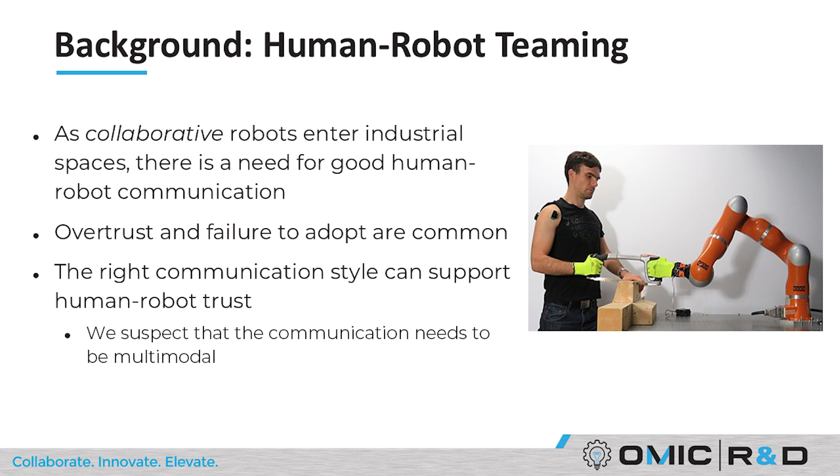We suspect that when we're doing this for robotics in particular, we may need multimodal communication. Most likely you have alerts, lights, sounds, and on-screen messages in your own organizations already when it comes to automated technology interacting with people.

When we're thinking about robotics in these spaces and wanting to grab human counterparts' attention as they interact with robotic systems, we're thinking about a suite of potential communication mechanisms, partly because the space is already so noisy and crowded. Maybe we need motion, sound, or verbal speech. Although under the umbrella of the project I'll talk about today, we're mostly thinking about expressive motion as a way to augment successful human-robot teaming in industrial contexts.

At a broader level, the framing of this work has to do with collaborative robotic systems, which for about a decade have been an exciting idea. We've seen many bids in industry to develop collaborative robotic arms. Some of these platforms are still in use, some are now defunct, but you can see the progress driving change in the model of robotic systems, moving from robots isolated by cages to robots that can move around warehouses with people and directly physically interact with people.

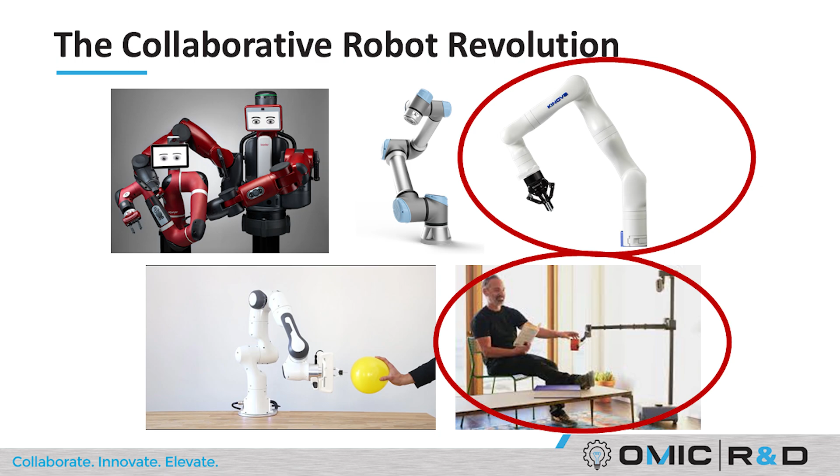Two platforms in particular that I've used throughout my work so far are the Kinova Gen 3 arm and the Hello Robot arm. The Kinova is nice because it's a collaborative robotic system in a classic industrial robotic form factor. Robot arms have been around for a long time, although historically more often in cages than not. The Hello Robot is nice because it represents a modern mobile manipulator.

So a robot with a mobile base and also a grasping arm, which, when you want to deploy robots and really get impact out of them, it's helpful if they can grasp things and move around floors with things. So we were thinking about those robots as we developed this work.

In the current phase of this work, as we continue the project this year, we're thinking about the Kinova arm more. In the work I'll present here today, we were mostly thinking about the Hello Robot Stretch, the mobile manipulator form, which can move around and also manipulate objects for things like part tending, pick-and-place operations, warehouse operations, that sort of thing.

When we boil down the problem to its core context, the basic problem we were trying to address is that communication between humans and robots is limited. Most industrial robots, at least for now, lack these nuanced multimodal communication modes, which can be detrimental when it comes to adopting and safely using new technologies, especially robotic technologies in industrial spaces, collaborative robots.

So our goal was to advance the state of the art of human-robot teaming by improving robot nonverbal expression, seeing if we could fill in some of these gaps in understanding what the system status is, what the system needs, its intentions, and being able to more successfully and symbiotically work with these types of systems in industrial contexts.

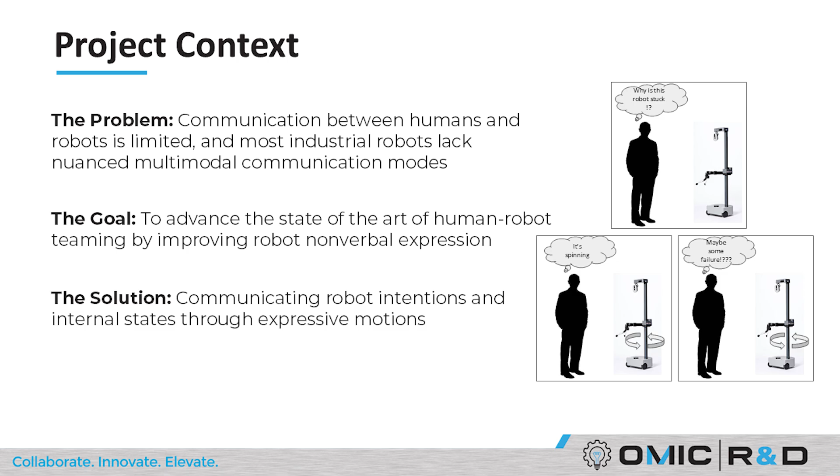For the scope of this round of the work, this first year of the project, which is the core of what I'm presenting here today, I'll look forward to presenting at the end of this project the latest updates with the Kinova Gen 3 as well. For now, we were really focused on the solution of communicating robot intentions and internal states through expressive motions.

In my lab's work in the past, we also have sound-based communication, both verbal and nonverbal. We've thought about things like the physical form of the robot, how the way the robot looks actually influences the way people approach it and adopt it. So for this project, we wanted to fill in one of the remaining slots in the potential multimodal human-robot communication, thinking specifically about motion.

But when you zoom out and think about the broader scope of my lab's research, this gives us just one tool in a suite of tools to be able to elicit successful human-robot symbiosis in industrial contexts.

So backing up to the core research questions, within the scope of the work I'll present today, we wondered how motion-based nonverbal expression of the robot could communicate its intentions and states to nearby people.

You'll see that in some robot videos I'll show, a beginning kind of psychological experiment that we did with robots and people, and I'll talk at the end about how we can expand this, thinking about broader multimodal human-robot communication and the work we're doing this past year.

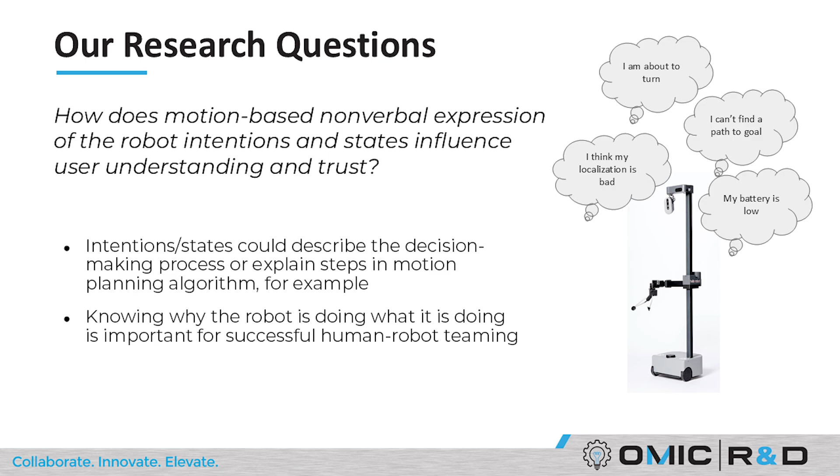Robots have internal states, they have intentions, they might have a status like low battery, maybe even, from the last presentation, a tool is about to run out and you need to replace it. All kinds of automated systems.

So understanding things about system state, whether it's notification, warning, or higher urgency error or alert, can be really helpful to be able to convey in a broader range of ways.

Also understanding things about intentions, especially when it comes to mobile manipulators. If you're walking around a warehouse with a robot or autonomous forklift, you might have done this before, understanding where the system is about to go, where it's planning to go next. Even simple things like that can be quite challenging.

So we're thinking about those types of problems, helping robots communicate states and intentions for more successful co-location by humans and robots in industrial settings.

This is important, I think, because being able to do this well can help with those challenges of overtrust and undertrust that I talked about earlier.

So under the umbrella of the work I'll talk about today, there were three main challenges or research tasks that we dug into.

One was simply representing key robot states. I talked about hypothetical things that we might want to communicate, but within the context of the work I'm presenting, what did we focus on?

We started more in the realm of thinking of notifications, warnings, and then errors, thinking about what would be really critical to potential use cases and industrial partners' work that we were collaborating with for the project.

We thought about communicating key robot states then, so if we already know what we want the robot to notify nearby people of, then we can think about how to communicate that.

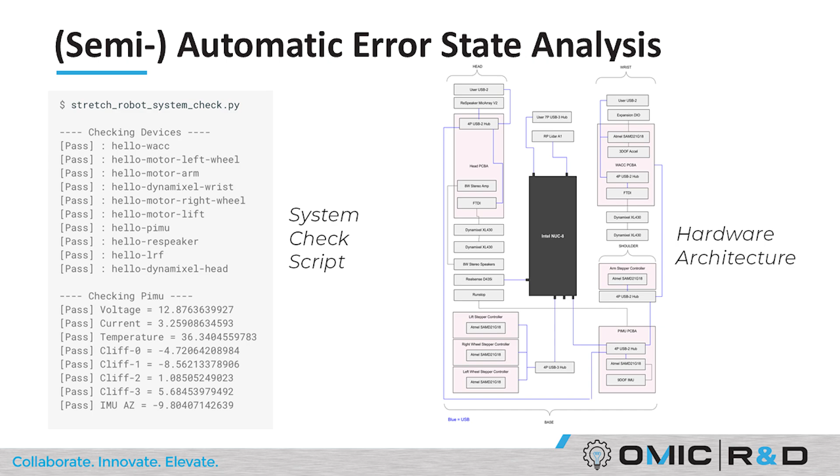So we looked at the logs that the robot already had baked into its system. We looked at the architecture, thinking about things like, is this wired or wireless? Does it have battery on board? What parts of the overall robot could be functioning correctly or not functioning?

We aggregated all of this information into a large table spreadsheet, thinking about whether each of these error states or potential notification states were urgent, if they urgently required attention, if they're just helpful information to communicate to nearby people, or maybe even if they're just simple notifications.

It could be helpful for nearby people to know about this, but it's not urgent or imminent. You don't necessarily need to grab their attention and force them to know this if they're just passing by and might not need to know it.

We also thought about state machines. So for the Hello robot, the Stretch RE2, we were using it for pick-and-place operations in our first topic of study. We thought about how this bakes into an overall finite state machine.

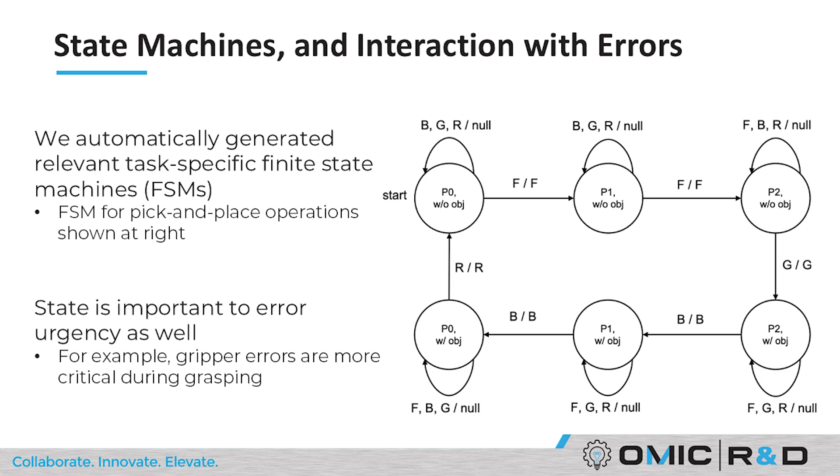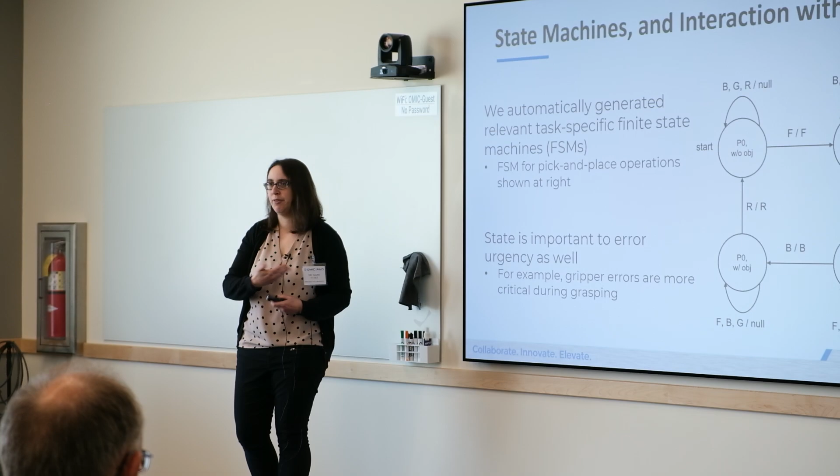This is important in part because at different parts of the state machine, different parts of the robot are active. So you could imagine that a warning about a gripper is more ultra-urgent when the robot's about to do a grasping task compared to when it's just driving across the room to approach a target of interest.

So moving right along for now, we can dig in and talk about some of these topics as interest all of you later as well.

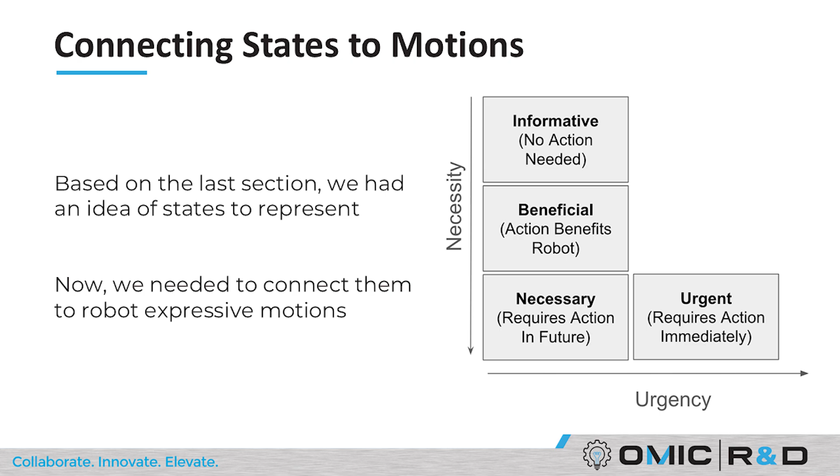But we next thought about how to communicate these key robot states. So in the process of grasping, you could have things like localization failure, an arm isn't working properly, a low battery state, since this is a robot that's moving around, operated off of a battery, that kind of thing. And we use the overall framework again of thinking mainly about notification, warning, and then more urgent alerts. So we thought this would be sort of most relevant to everyone's bottom line here, most relevant to early introduction in industrial contexts. We were thinking about this as it pertained to a mobile manipulator that was performing a pick-and-place grasping task, which can be relevant to all kinds of things, part tending, warehouse settings, other pick-and-place.

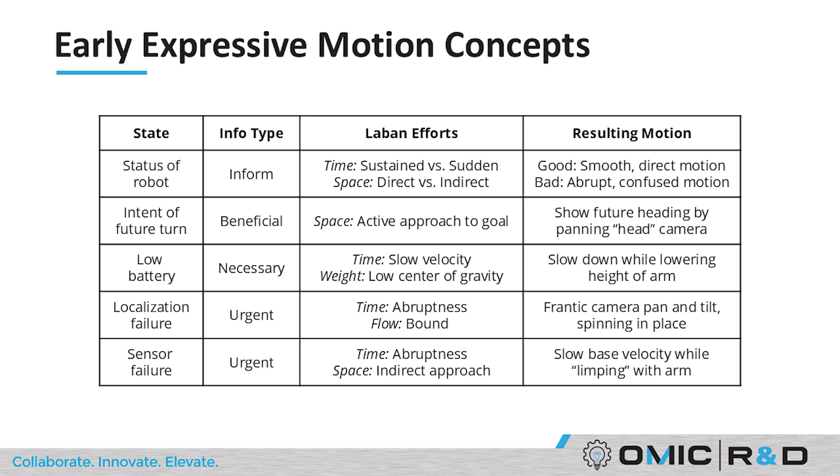When we were thinking about early expressive motion concepts with that overall notification, warning, error framework in mind, and the grasping context as well, we thought these might be some representative early examples that we want to be able to demonstrate through simply the motion of the robot to nearby people. So we thought, maybe just conveying the status of the robot, I'm on this pick-and-place mission. That's a notification, but it's not urgent. Other things like projecting where the robot's about to go, warning about something like low battery, or even letting the user know about more urgent problems like localization failure, sensor failure. This was sort of our early expressive motion concepts for this system.

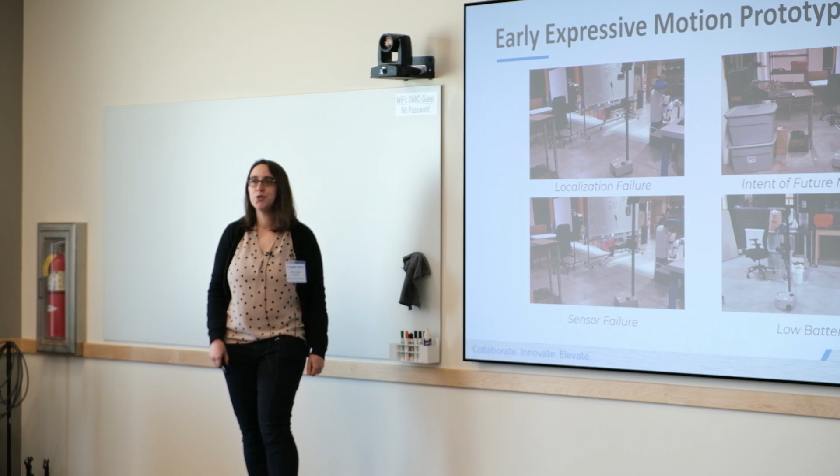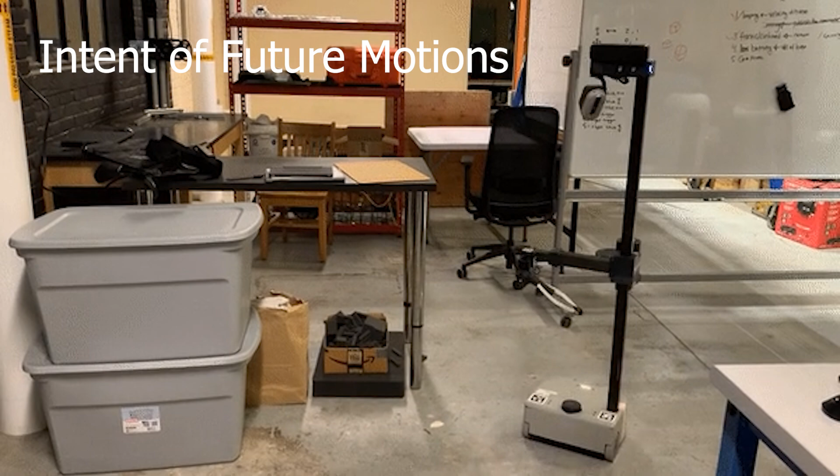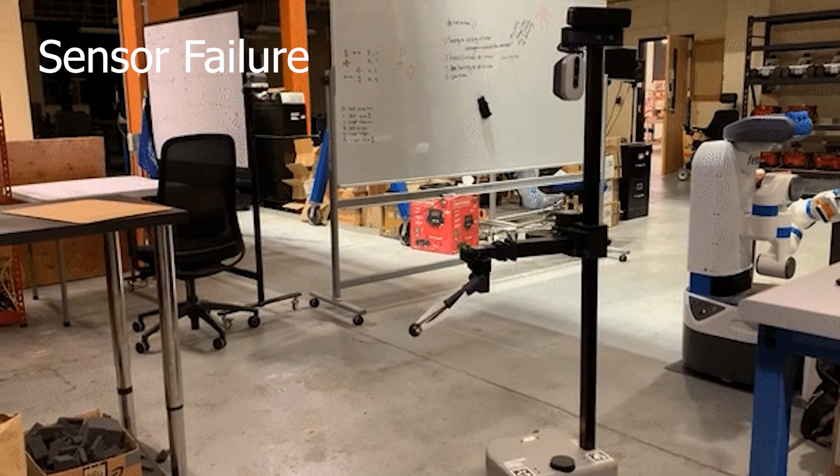And then we wanted to design robot motion that would communicate each of these. So in each of the videos that are already playing up here, as you look through them, you hopefully see robot motion that could potentially convey these important messages to nearby people somewhat naturally, hopefully even without a need for training, which I know in industrial settings is expensive. We want the messaging of the robot to be so simple, so straightforward that people can just look at these things and understand what the robot's trying to convey.

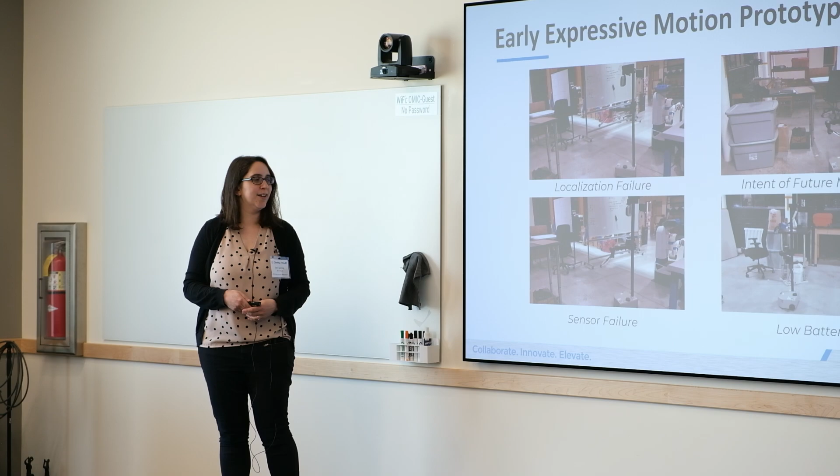So as we design these behaviors, we thought about how expert movers and dancers might address this problem. In localization failure, the robot's kind of rotating, looking around, is one example. Low battery, the robot's getting lethargic and the arm of the robot is falling. So hopefully starting to convey some of these ideas about important robot status that might need to be known by nearby people to the robot for successful adoption and symbiotic use of this type of system in industrial contexts.

We didn't want to just design the motions and say, we did it, they're great. We also wanted to evaluate them, so we ended up with a set of these early motion contexts, basically two that were more of a baseline, nice to know information but not urgent information contexts, like pick-and-place going as expected, some that conveyed partly functional statuses, low battery, you need to plug the robot in or help the robot get to a charging dock soon, or something like the uncalibrated tool, which in some cases might be urgent.

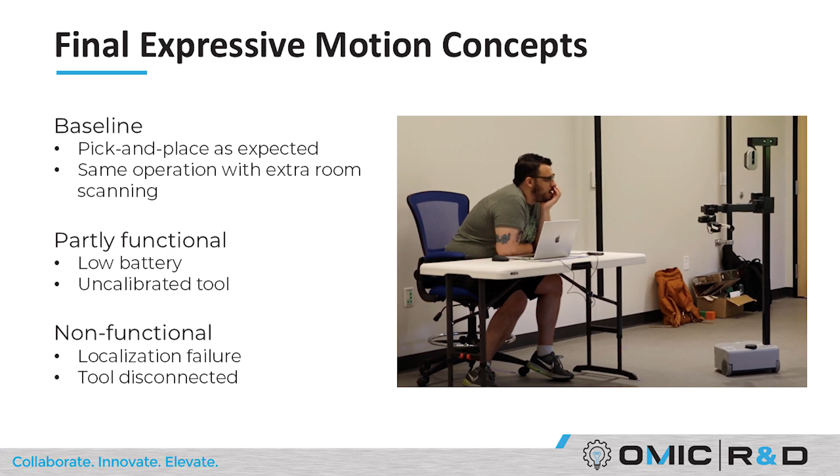I'm about to grasp, that it's urgent. In other cases, maybe the robot's just moving across the warehouse floor for now, it could get to its dock and be serviced later. And also thinking about more urgent cases where the robot would be non-functional due to the status message, so cases where we really want the nearby person to notice something is wrong and act right away.

So those were our early concepts, and then we wanted to again assess these concepts. So we used a small in-lab human subject study to begin to assess whether these robot motions were conveying the types of messaging that we wanted. In this early pilot experiment, we engaged with 8 participants, brought human participants into the lab.

There was the mock context of the stretch tending parts, so it was doing a pick-and-place operation of a block, moving blocks from one table to another in the lab space. And we measured things about the behavior of the people who were interacting with the robot.

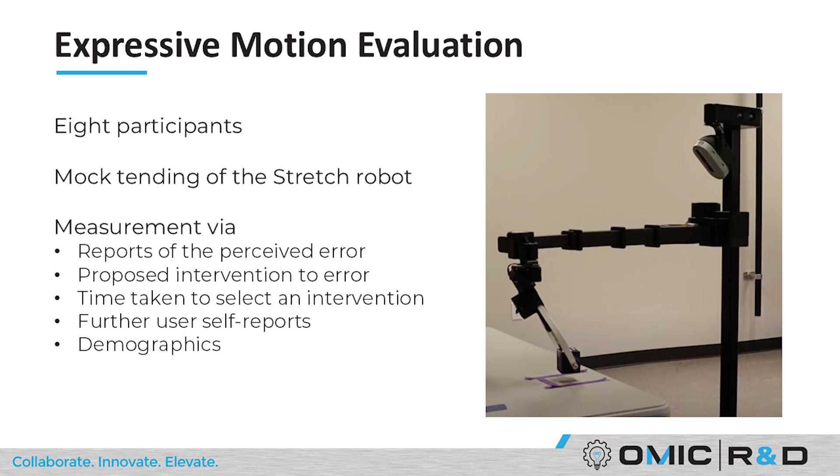So like when they noticed there was an error, whether they interjected and said there was an error happening, and also some self-reports, survey-based methods on scales from strongly disagree to strongly agree. How much do you think these things are happening?

The outcomes from the first round of robot motion concepts conveyed that folks had a good understanding of the baseline cases that didn't require intervention. They could tell that the robot was successfully performing its task and didn't notice anything urgent that needed intervention.

They also understood well the low battery and localization failure tasks, or behaviors of the robot, nonverbal communication meant to convey that these things were happening. There were other motions that, at least in this first round of work, weren't fully developed. Folks had difficulty interpreting the uncalibrated tool and disconnected tool context.

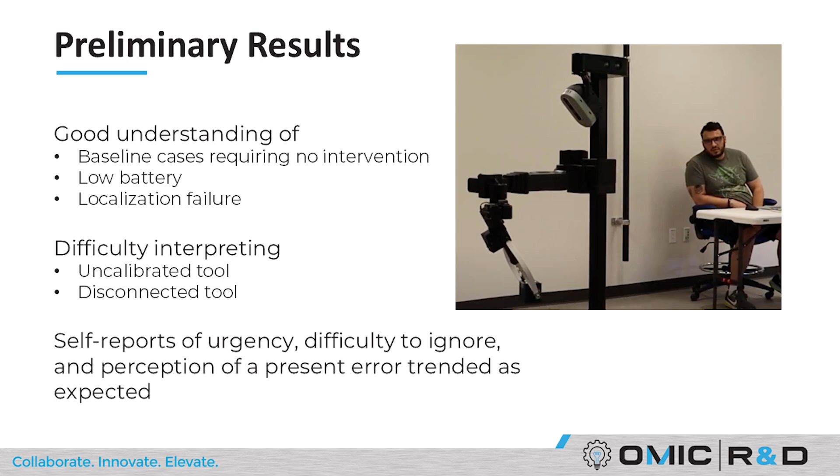We did see overall that self-reports about urgency, difficulty to ignore, and perceptions of an error being present trended in the direction that we wanted. As we formulated those different hypothetical robot statuses, we wanted some to appear more urgent than others, calling for intervention more urgently. We did see, as far as descriptive statistics went, that everything trended in the direction we would have wanted across those groups.

So some potential for improvement, but some promise, especially as proof of concept for certain nonverbal motion-based robot messaging.

In the current times, we're pushing this concept onto the next phase. In the current work, we're looking more at robot arms, in part because I think these arms give us more degrees of freedom to convey expressive motion in a variety of ways, sometimes with kinematic redundancies that help us get a little more creative.

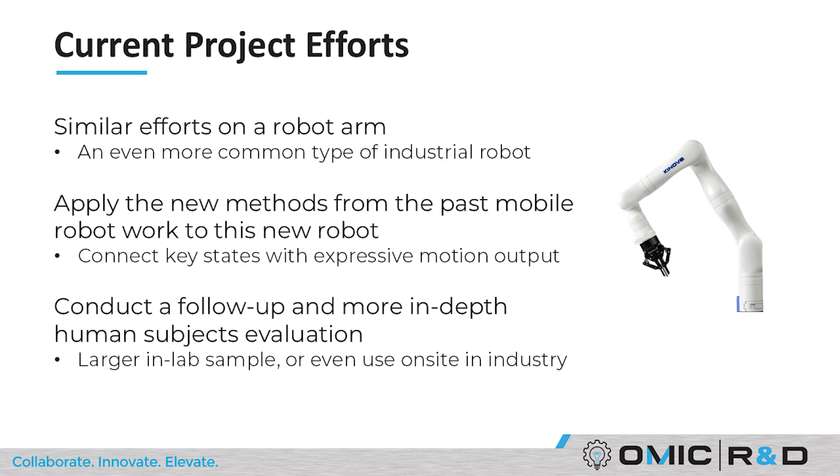So we're working now on the Kinova Gen3 with a similar idea, trying to convey different types of expressive motion naturally with the robot arm, adding to our overall set of nonverbal and verbal robot communication methods that can contribute to the overall multimodal communication of industrial robots to nearby people for more successful collaboration and teaming.

Right now we're working on conveying those expressive motion ideas to this arm and doing a second round of evaluation. I'll show you some of the motion contexts, partly because robot videos are fun to see. You can see with this robot arm, even if the functional task is the same—in this case the robot is trying to approach a particular point of interest as if beginning a pick-and-place task—approaching the object of interest to begin with.

You can do it in a more direct way, or you can do it in a more indirect way, even if in the end you're approaching the same destination.

So this could be useful as one example for conveying whether the robot has sensor information that's very good—it feels very confident about its directive—or if it is less certain, maybe with a higher degree of uncertainty coming from its onboard machine learning classifiers, as one example.

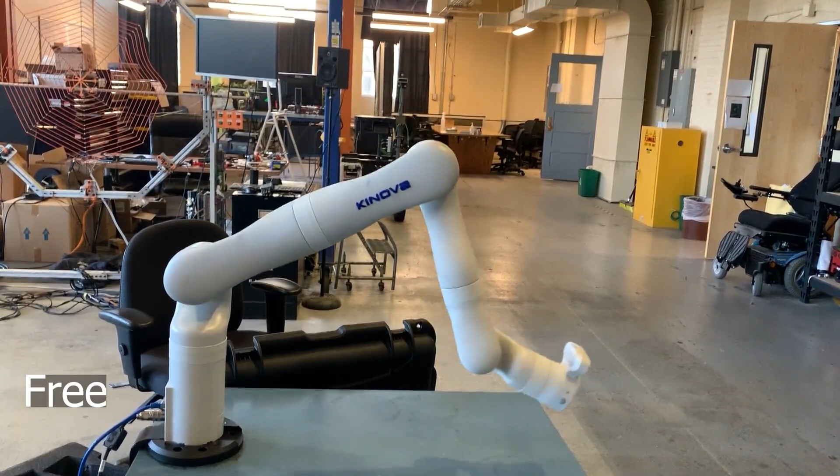Here's one other style, a free style, where in the end the robot is still approaching the same point of interest, but in a very different way. We explored several axes of expressive space as we were starting to put together this project.

For now, research outcomes and applications of this work—I've alluded to this somewhat throughout—especially with the robot arms we're currently working with, and to some extent with the mobile manipulators like the Hello Robot stretch robot, because of kinematic redundancies, it's possible to be doing some functional core tasks, like pick and place, part tending, those types of interactions I've been talking about, while also layering on some more informational motion.

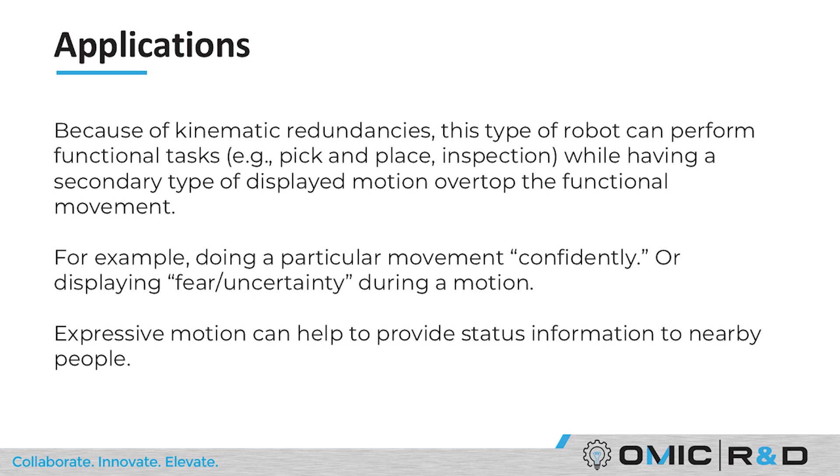So it doesn't get in the way of what the robot is already doing, but it can illustrate some other type of quality, some internal state, some intention of the robot, just based on that motion layering.

So the example I just mentioned of the direct versus indirect approach of the robot to some point of interest is a direct motion might naturally convey confidence, whereas the indirect motion might convey more uncertainty or something wrong during a motion. So overall, we're curious about this potential of expressive motion to convey status information very naturally to nearby people in these collaborative robotic system contexts.

Resulting capabilities, I've touched on this some throughout too, but we think being able to render expressive motion and apply it can help convey things about robot status and intention, all the way from very functional safety warnings in industrial contexts, all the way to the social, if you have this type of robot in your home setting, in personal day-to-day use, or even in campus delivery, if you've seen those on-campus food delivery robots at Oregon State or elsewhere. It's helpful for robots to be able to convey things about internal state and intention so that nearby people can stay safe, move confidently, have a good experience as they're interacting with these systems.

We're thinking in general about presenting multimodal information from robots to be able to support this goal of more successful human-robot teaming. So in our case, within this presentation, I talk mostly about expressive motion, but my lab also thinks about sound and form, all kinds of aspects of, as people approach these types of robotic systems, what they will presume, what they'll naturally infer from the way the robot looks and sounds and moves.

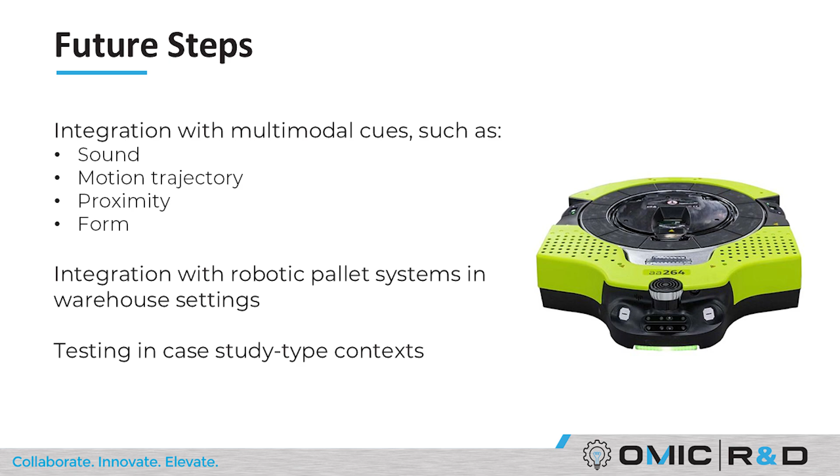In proposed future work that I'm hoping to undertake related to this project, I'm planning to do interviews with industrial partners, learn about applications similar to the ones that I've been talking about that all of you are already excited about, and hopefully pick a few where we could deploy a test robotic system. I've seen this work well as one quick example with interns who come from our robotics program and work with folks over the summer, and maybe be able to serve part of your bottom line needs while also being able to conduct research to evaluate that this type of interaction can be beneficial.